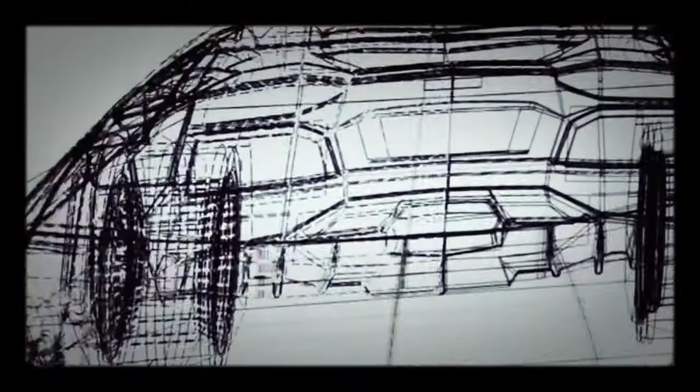But this will be no simple reworking of Lamborghini's old flagship models. Its engineers and designers are given the task of starting with a completely clean slate. At its mega factory in northern Italy, the Lamborghini team has been stretched to its limits to fulfill those expectations. Now, as its latest creation takes to the road, it will be seen if the high-risk strategy has paid off.

Lamborghini has been responsible for some of the world's most iconic sports cars of the past half-century: the 350 GT, Miura, Countach, Diablo. The brand has achieved global recognition for its no-holds-barred approach to automotive engineering. Its extreme and powerful machines have placed it among the supercar manufacturing elite for decades. But there's no room for complacency in this increasingly crowded marketplace. A decade since the launch of their last flagship model, the Murcielago, it's time for Lamborghini to flex its muscles once again.

It's up to Stefan Winkelmann, the company's CEO, to come up with a bold approach. One of the toughest things was to give the right briefing, and it took us weeks and months. And once I went home, I was thinking about it, and it's so easy, it's just down to two words: no competitors.

Four years of intense development follow, conducted in fiercely secretive conditions. Our factory was as closed as Fort Knox. We had to prevent anybody from coming in and taking any picture to avoid leakages.

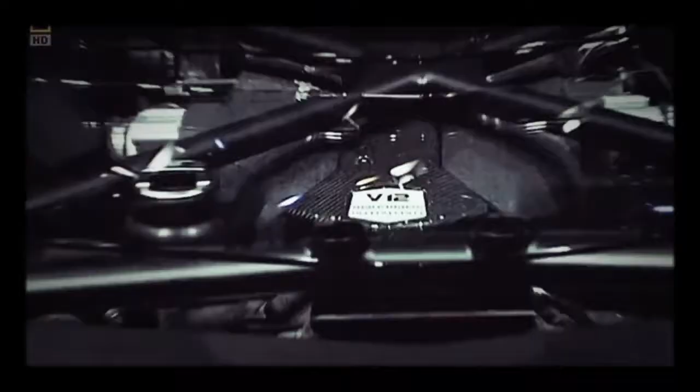But finally, in March 2011, at the Geneva Motor Show, Lamborghini casts off the secrecy and unveils its latest model, the Aventador LP700-4. Its launch has huge implications for the future of the company. For us, the Aventador was something which has to re-establish the leadership, to be a benchmark for a decade. So it has to be a jump of two generations, something really different from what has been there.

Powered by Lamborghini's trademark V12 engine, the Aventador can reach speeds of up to 350 kilometers per hour, and it travels from 0 to 100 in under 3 seconds. It's their fastest car yet.

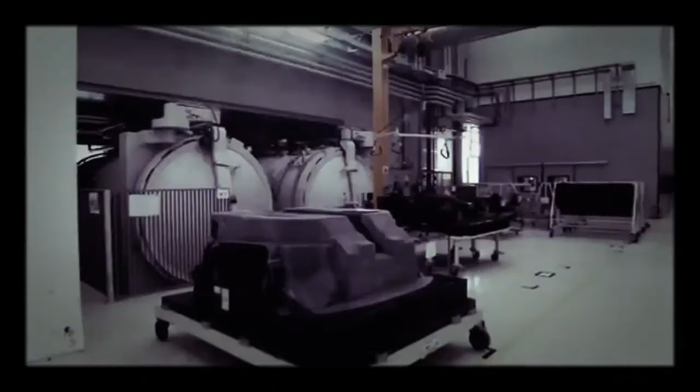But remarkably, speed isn't even top of Lamborghini's priorities for the Aventador. Stefan Winkelmann has laid out his vision in a manifesto for the future of the supercar. Now, in our days, it's much more important to speak about the power-to-weight ratio, the balance between the power of the car and the weight of the car. For us, in the future, it's much more important to reduce the weight, because you get a better feeling, a better driving experience.

The Aventador is the first test of this new blueprint. The National Geographic Channel has been given unique access at the Lamborghini factory to witness the creation of some of the car's first incarnations.

This is Sant'Agata Bolognese, a typically picturesque town in the heart of Italy's Emilia-Romagna district. But it is in fact anything but typical, as it's home to Lamborghini, one of the world's most renowned supercar manufacturers.

The factory is situated in the heart of what is known as Motor Valley in northern Italy. Sant'Agata is intrinsically linked to Lamborghini's success, according to its head of communications, Raffaello Porro. Everybody in the world recognizes our cars come from Sant'Agata Bolognese. And so our factory is a kind of temple where people come, almost a pilgrimage, to visit where those cars come from.

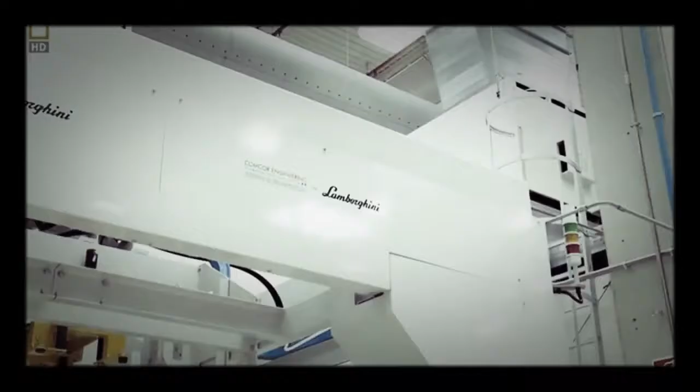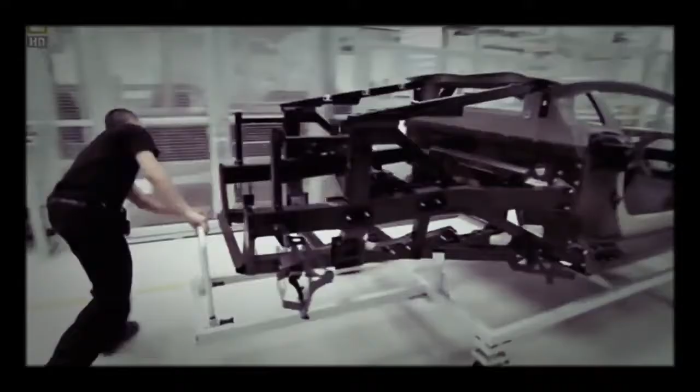The factory has seen many changes over the years, but its purpose has never wavered: to produce vehicles that challenge the status quo. And a largely local workforce is a vital part of that ethos. They're coming from this region, not even from the wider region, from this part of Emilia. We are in Emilia-Romagna, the Motor Valley, and a lot of our people are not only living here, they were born here, they've been here for generations. A lot of the workers we have in our factory, in our plant, are here at the second generation.

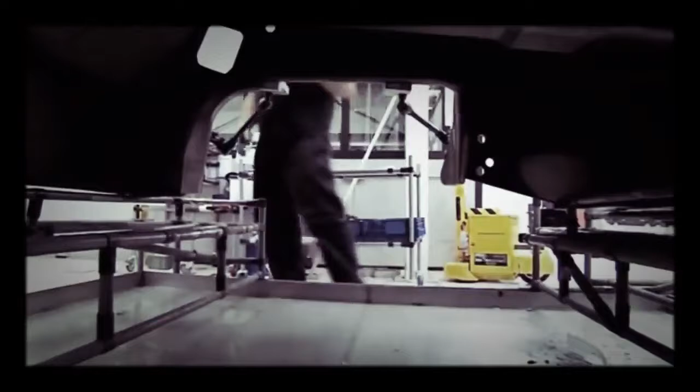These people are Lamborghini's lifeblood, over 400 individuals working with a singular aim: to produce high-end vehicles that consistently capture the public's imagination. In the last couple of decades, a new breed of creative and high-tech vehicle specialists has emerged. Companies such as Pagani and Koenigsegg have set their sights on toppling the most revered names in supercar engineering. Names like Lamborghini.

But it's unlikely that this Italian giant will let its mantle fall without putting up a fight—an attitude embodied in the company's emblem, the Raging Bull. Partly inspired by the bravery of Spain's legendary fighting bulls, one of which showed such fearlessness in battle that it was awarded a trophy for its courage in 1993.

Its name was Aventador, and almost 20 years later its legacy lives on in Lamborghini's latest model. It's Aventador's battling spirit that Lamborghini's development team must channel.

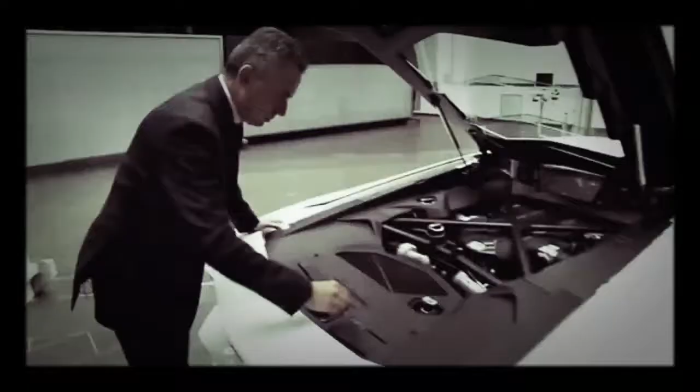In 2007, they're faced with the daunting task of creating a supercar that sets the standard for all others. Maurizio Reggiani, head of research and development, realizes that the only way of doing so is to take a step into the unknown.

We had to completely redefine the car, to start from a blank sheet of paper, and on this sheet determine, for each function, all that was needed to ensure that we'd have the best car in the world—to completely redefine what constitutes a super sports car.

To start from a completely clean slate is extremely high risk, and it's up to Reggiani to convince the board that it's the right thing to do.

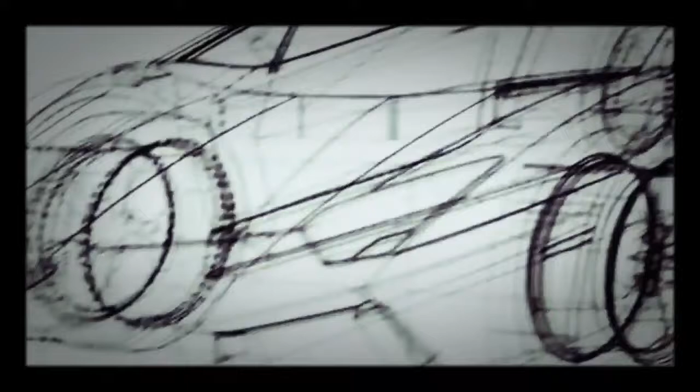This was one of the hardest things, because the project we were presenting had nothing in common with the old Murcielago, not with anything that existed in production at all. So it really meant beginning from scratch, with all the risks that come with that.

But the board decides the risk is worth taking. At the end of the day, they understood very well, because this is, again, about what Lamborghini is all about—to recreate and to be always revolutionary in the approach.

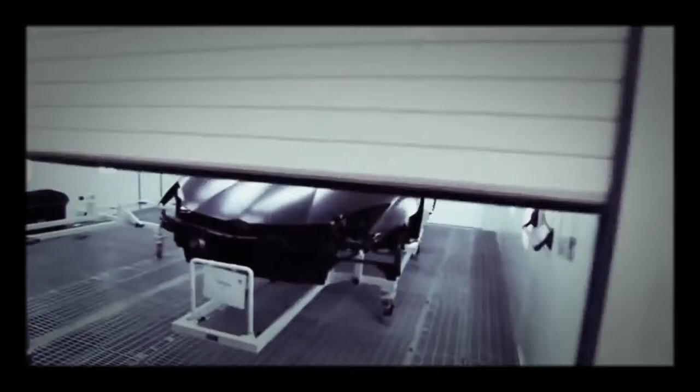The spirit of innovation is apparent in every fiber of the Aventador, as Lamborghini know that the fight to stay at the top won't be won through half measures.

And nowhere is that combative approach more apparent than in their focus on lightweight construction, which they've taken to new levels with an entirely new concept for road cars: a full carbon fiber monocoque.

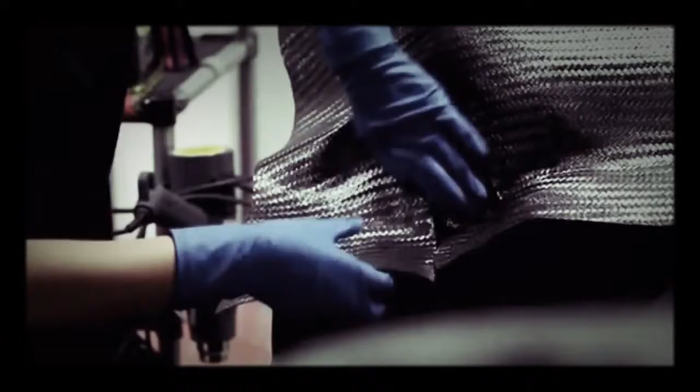These structures are common in racing cars, but the high cost of materials and laborious production methods have made them unavailable to supercar manufacturers, who've had to combine carbon fiber with cheaper, heavier elements, such as aluminium. That is, until now.

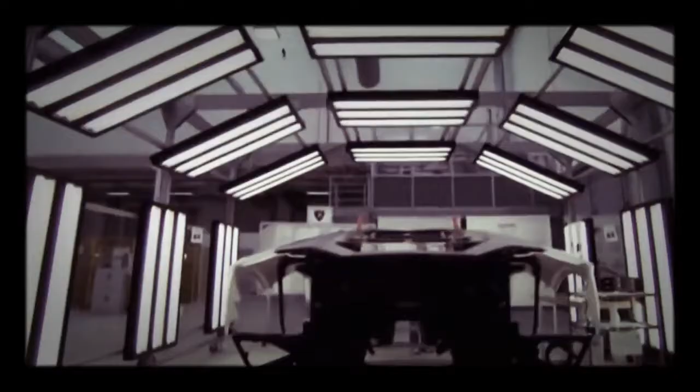The development team has devised a method that allows this race car technology to be mass-produced. But it requires a specialist facility that's up to the task. So in 2009, they build a whole new mega factory just down the road from the company headquarters, devoted to constructing the Aventador's unique carbon fiber body.

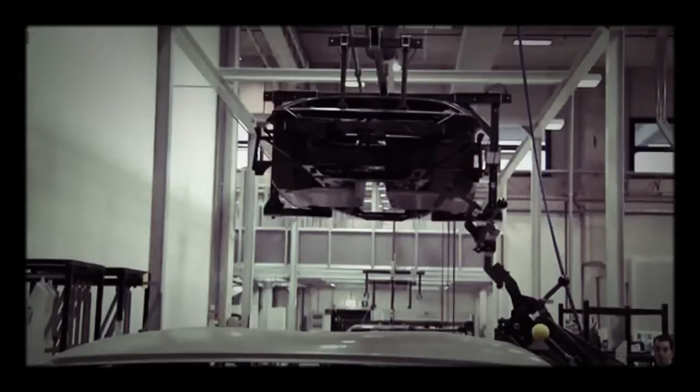Which, being just 147.5 kilograms, helps make the Aventador significantly lighter than the Murcielago, considerably improving the all-important power-to-weight ratio, and in turn, the handling.

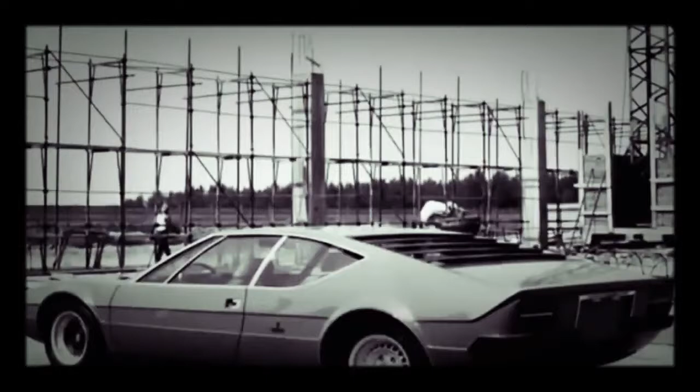Lamborghini hopes that this innovation will stave off the threat by the new wave of rival companies. Lamborghini knows well what it's like to be the cocky young upstart, vying to unsettle the established names, as that's how it began almost 50 years ago.

The man upsetting the status quo back then was the company's founder, Ferruccio Lamborghini. He had made a fortune from a tractor manufacturing business and used some of his money to satisfy his love of sports cars.

According to Lamborghini legend, when he went to Ferrari to critique some of their parts, his views were dismissed. He got a negative response to some requests he had and proposals to make a better car. And so he said, I will found my own company and I will create the best super sports cars ever.

He established Automobili Lamborghini in 1963, and for the next few years he toiled furiously to achieve his goal. The cars he created were well received, but it wasn't until the launch of the iconic Miura in 1966 that Lamborghini really made its mark.

The tractor maker had succeeded in breaking into the exclusive world of supercars with his bold new enterprise. Almost 50 years later, despite having joined the ranks of well-established sports car manufacturers, the company still strives to be edgy and uncompromising.

As demonstrated by its approach to the area it believes will define the future of sports car engineering: lightweight carbon fiber construction.

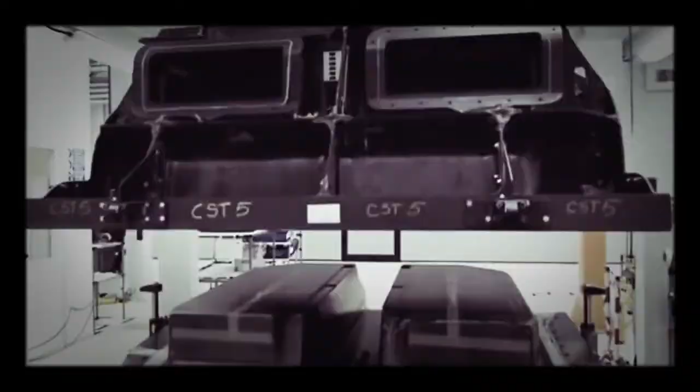The company's relationship with carbon fiber goes back as early as the 1980s, when it created the Countach Evoluzione, a concept car which experimented with the use of composite materials. It was dreamt up by the newly formed Composites department, whose successor has made many inroads into research and development of lightweight composite materials.

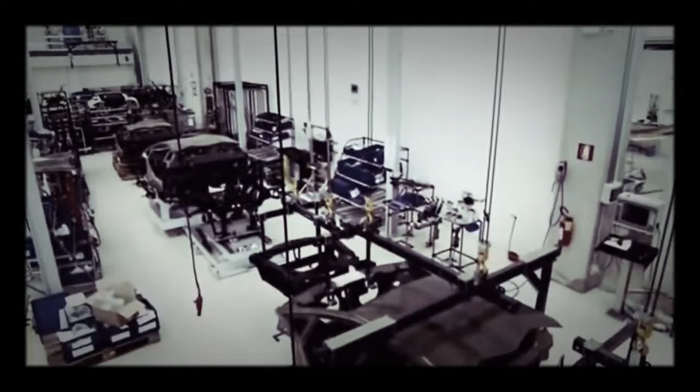And discoveries made here mean that next door, the company has been able to construct its new carbon fiber production facility.

The man given this task in 2009 is Ranieri Niccoli, Industrial Director, and he must devise it completely from scratch. When we designed and built this factory, we didn't have any automotive benchmark. We were the only one in the automotive business to build and run this kind of technology. So they have to look elsewhere for inspiration.

We looked to other sectors, for example the aeronautic sector. Then we adapt and modify their process to a Lamborghini production system in order to build our car.

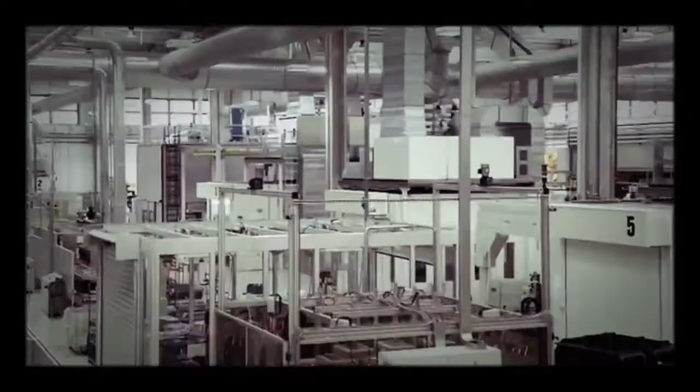The result is 500 square meters of new production space, known as the CFK, devoted entirely to sculpting the Aventador's super lightweight monocoque.

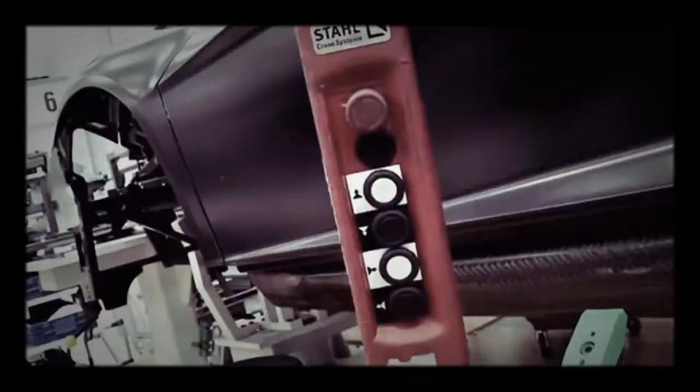Here, 146 carbon fiber specialists toil day and night to create 4 complete monocoques every 24 hours.

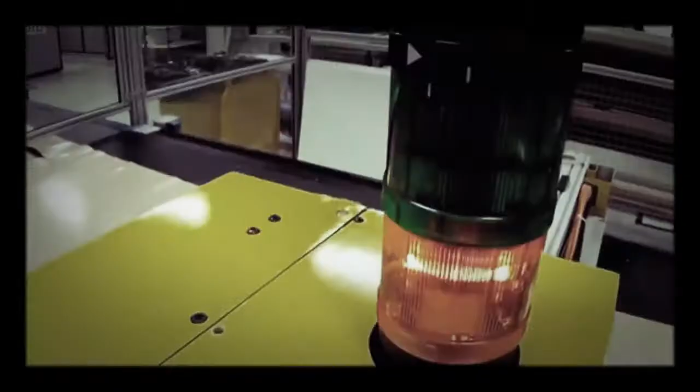To achieve this target, engineers have developed a unique production system. All materials are first cut by an automated machine before being sent for preparation.

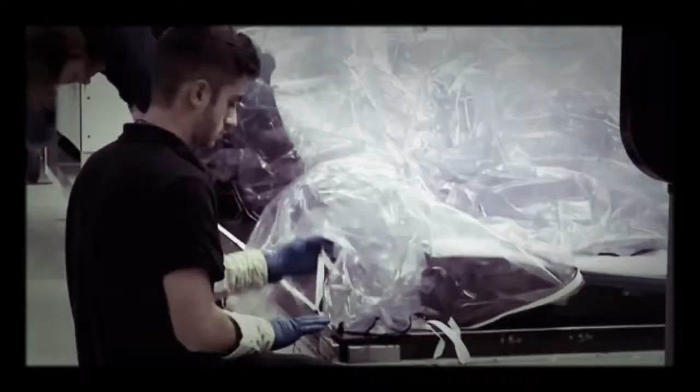The material is placed into molds and laminated in a vacuum bagging process which forces the layers into shape, before being cured in a large pressurized oven known as an autoclave.

Meanwhile, the production of other parts of the monocoque is underway, as operators fine-tune and cut more layers of carbon fiber with the assistance of precision lasers.

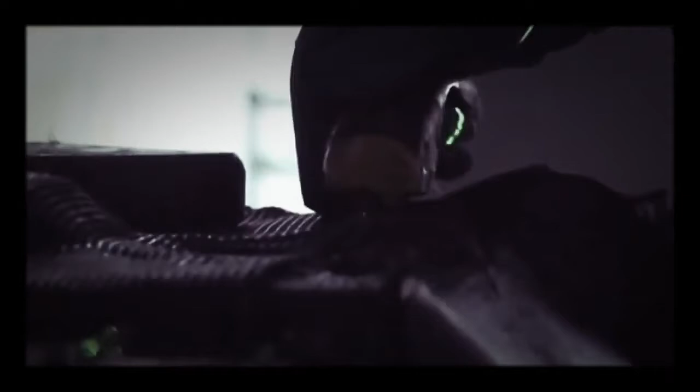A special oven is used to inject resin into the carbon fiber mats, which transforms them from soft sheets of cloth-like material to a strong, rigid structure.

After all these processes are over, the two key sections are finally recognizable: the base section, known as the tub, and the roof.

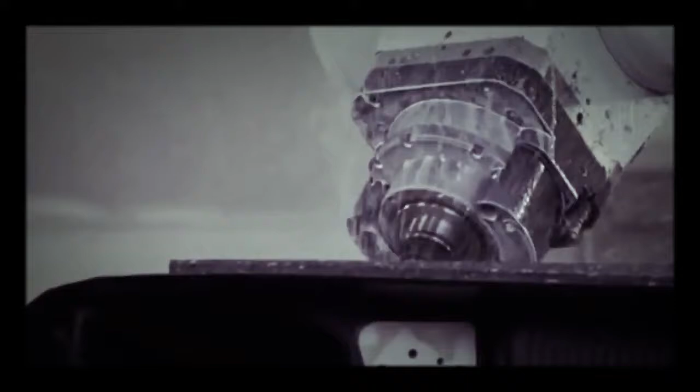They're placed in an automated machine, which drills them with holes allowing for attachments to be made later.

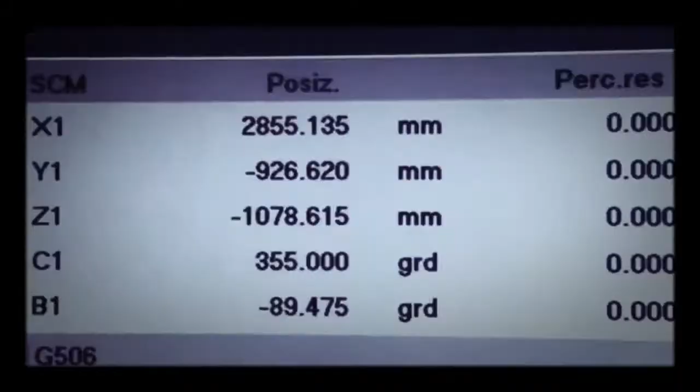Throughout the factory, computer-controlled machines share tasks with human specialists, a partnership that's integral to the Lamborghini production process.

The main priority of our plant was to follow the Lamborghini production system, so with a high degree of craftsmanship, high degree of skill, people, combined with technology and an automatization process. This was the main challenge that you can also see in our plant.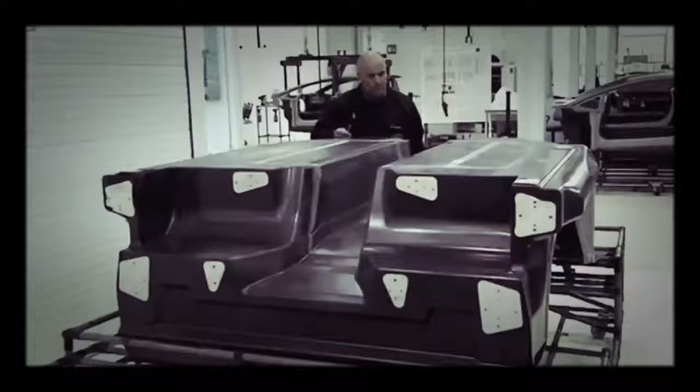Aeronautic-inspired engineering is ingrained in many aspects of the Lamborghini CFK production process, such as this stage, known as the Harmonic Hammer Test.

In this quality control test, an operator strikes the monocoque section with a specially designed hammer and allows it to vibrate, listening out for areas where air might be trapped in the carbon fiber shell.

Once checked, the parts are ready for their union as the tub and roof are glued together, turning the monocoque into a single entity.

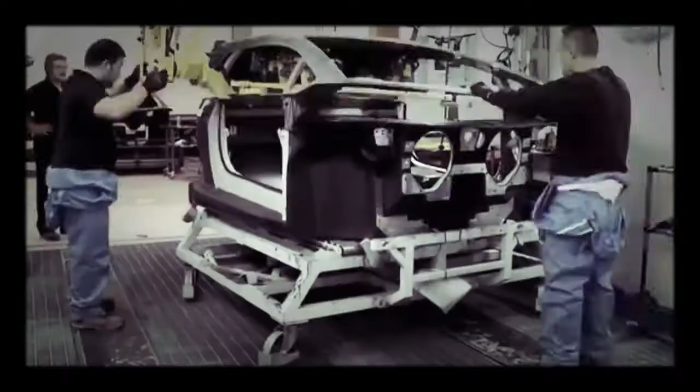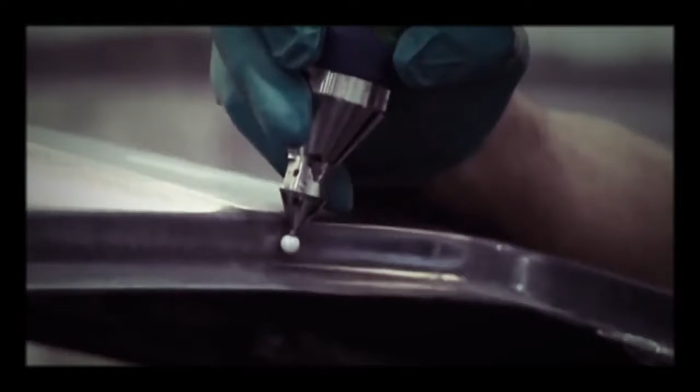It's essential that the two parts of the monocoque are exactly aligned, so workers use a robotic arm with a 3D laser attachment to check that the sections have been coupled correctly.

Once the correct dimensions are confirmed, metal sections are manually attached to the monocoque and the body is complete.

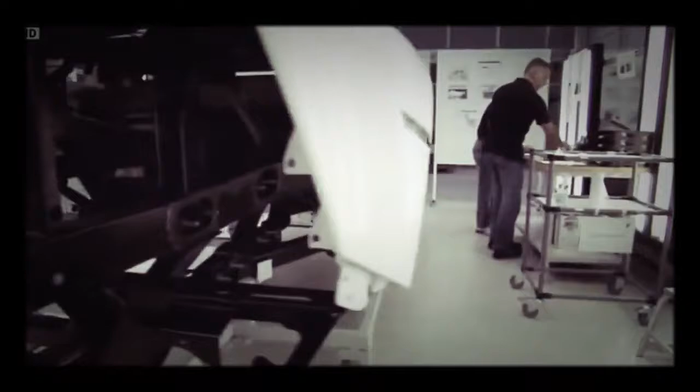Then it's into a light tunnel where surfaces are quality checked to ensure they're in pristine condition before the Aventador's body is signed off for release.

As the body is ready to leave the carbon fiber plant, it's possible for the first time to see the Aventador's unique geometry taking shape.

This extreme design is one of the most recognizable aspects of the Lamborghini DNA, and it's a tradition maintained and pushed forward here at Lamborghini's design center, or Centro Stile.

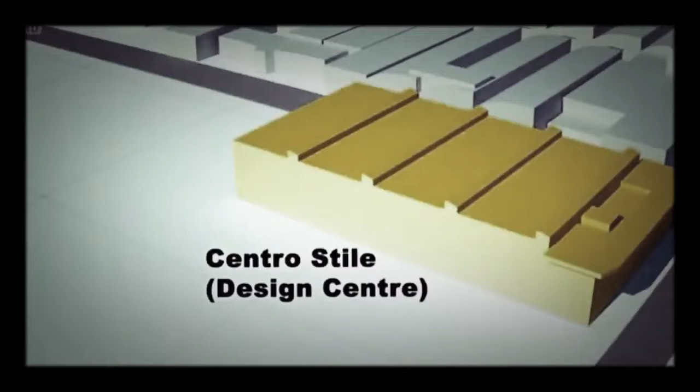The generational leap required of the Aventador does not stop with its engineering capabilities. The look of the car is integral to its ambition.

The design of Lamborghini always has to be revolutionary. You have to understand, if you see a car in front of you, this can only be a Lamborghini even if you don't know the model. So it's very tough for our designers because they have to create something new, but recognizable at the same time.

The job of the design team and its chief, Filippo Perini, is made even tougher during the earliest phase of the Aventador's development, when the board forces them to compete with outside companies to earn the right to design the new model.

And at one point, victory comes close to slipping through their fingers.

So we take it from nature, sport, technology, lifestyle, elements that we can integrate, and in that way, brainstorming gives us many design options.

Details like the ignition button and TFT screen seem to come direct from a jet fighter cockpit. And the world of aeronautics influences a lot of other style choices besides.

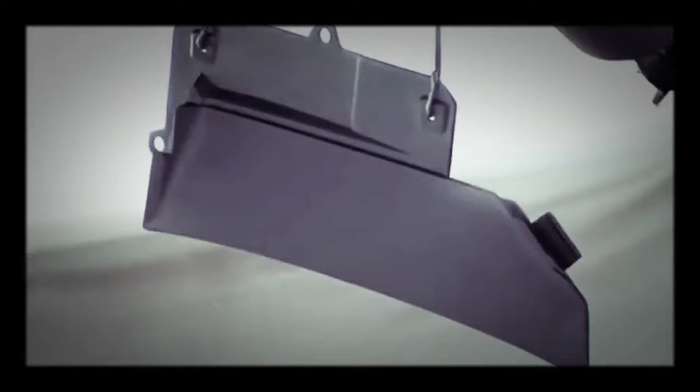One of 13 colors are hand-sprayed over every part of the bodywork. 27 pieces are given individual attention by a specialist who covers them with 8 liters of paint. The Aventador, with its extreme lines, requires more man-hours than any other Lamborghini in the past.

And of course, every phase is carried out manually, as only human analysis and dexterity can ensure that each surface is covered with exactly the right amount of paint. In total, 200 man-hours are spent on every single Aventador while at the paint shop.

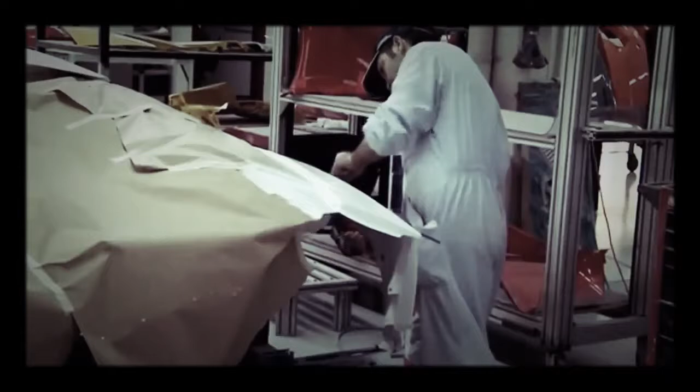3 whole days are spent on polishing alone. After being carefully sanded, the Aventador is repeatedly buffed with special materials.

After that, it's sent for another quality check in a light tunnel. For 2 hours, an inspector walks around the bodywork checking for color perfection. If there's any inconsistency, the offending section will be sent back to be repainted.

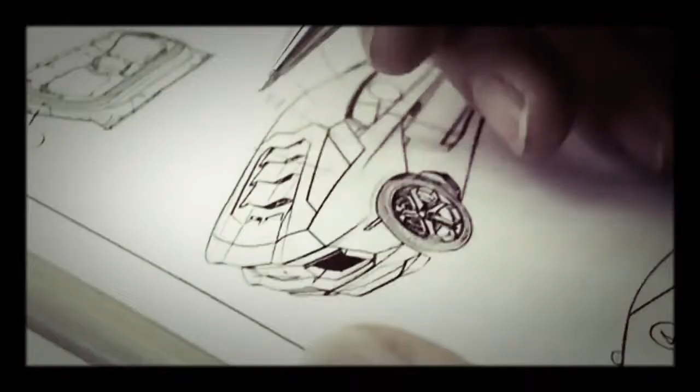Under-polished areas are also marked out for extra attention. These hundreds of hours of devotion end when the exacting standards of the inspector are met, and the car is released for the next phase of production, the assembly line.

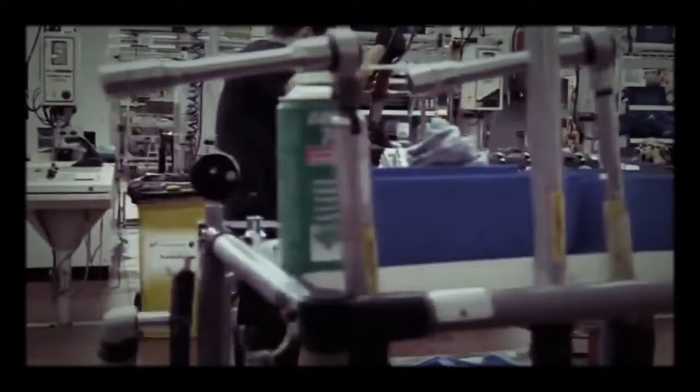The assembly line for the Aventador lies just meters from the original site of the Lamborghini factory, built almost half a century ago. Back then, its founder, Ferruccio Lamborghini, was known for his hands-on approach, frequently seen on the factory floor directing operations. He focused on the skill of the mechanic as being key to the success of the product, and that attitude still permeates the site today.

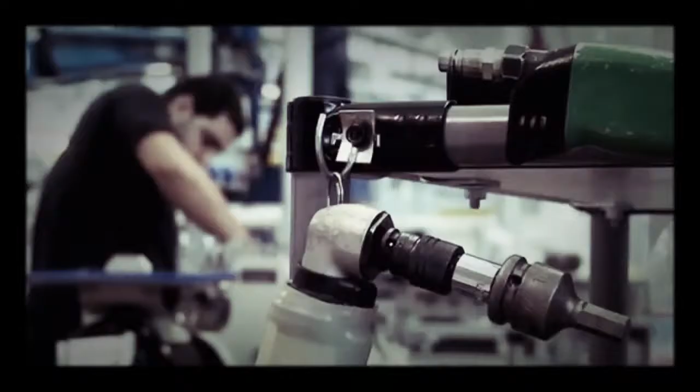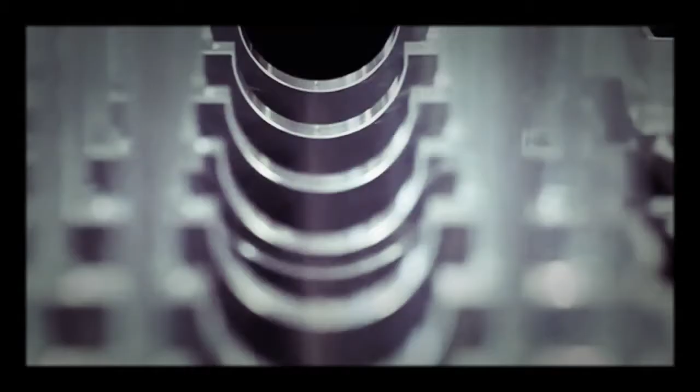Here, 50 workers spread over 11 workstations are responsible for the task of assembling Lamborghini's latest model. The man in charge of making sure things run smoothly is production manager Andrea Costantini. He sees his highly trained workforce as a direct link with the roots of the company.

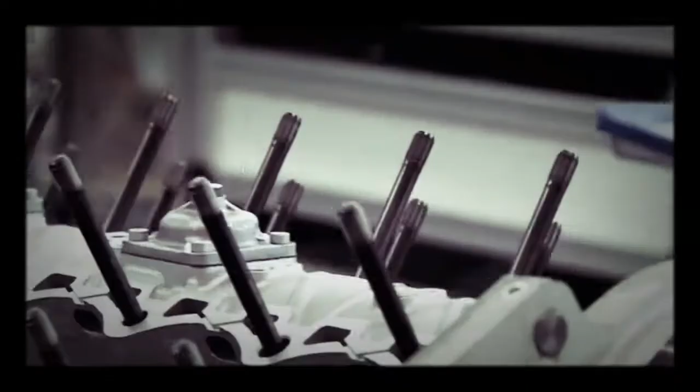In this case, the workers are the most trained. We take these guys directly from the best schools of mechanics of Emilia-Romagna, here in the surroundings of Lamborghini, and we train them for more than 2 years to allow them to be really the best experts on mechanics and engines. So everything is done manually, still like we did since 1963, since when Mr. Ferruccio Lamborghini, the owner of Lamborghini, started.

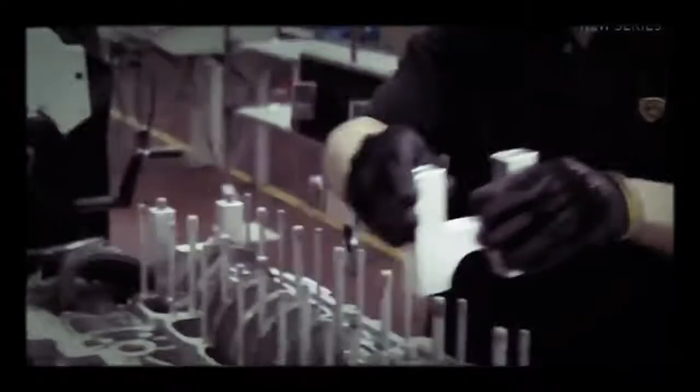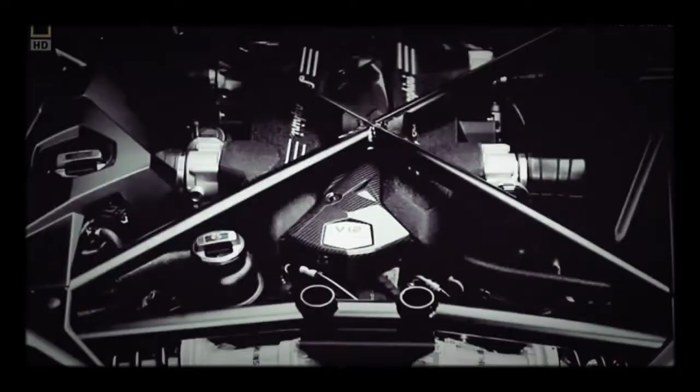In an age when machines dominate production in almost every field of manufacturing, loyalty to the art of skilled manual labor is not often seen. But here it's believed that when it comes to reliability and precision, humans still have the edge over machines. And nowhere more so than in the engine assembly station, for this is where the heart of the Aventador is put together: the Lamborghini V12.

At a time when many sports car manufacturers are shying away from using the 12-cylinder engine, Lamborghini is resolute. The V12 always has and always will provide the power for their flagship models. The V12 for Lamborghini is part of our DNA. Everything for us is rooted in our history, which started with the 12-cylinder engine.

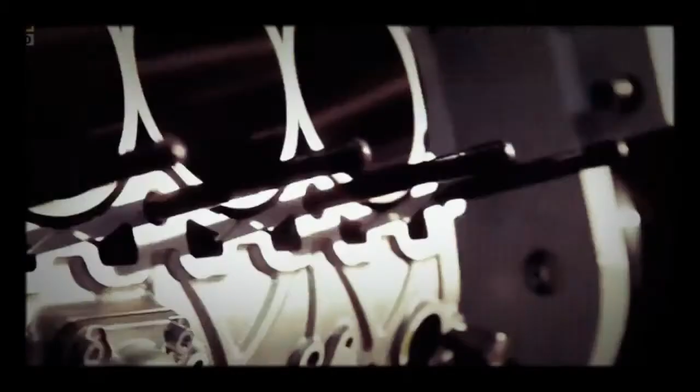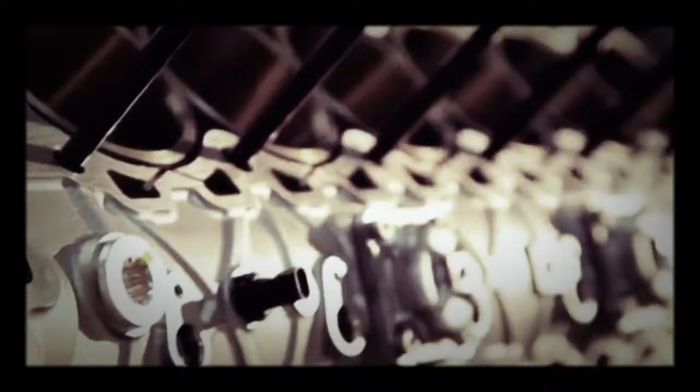With 6.5 liters of displacement and 700 horsepower, the Aventador's V12 is about as gutsy as it gets. But as with everything else, it's had to move with the times. Lightweight, again, is the order of the day. And despite the fact that this engine is more powerful than the Murcielago's, it weighs less, just 235 kilograms, by using aluminium silicon alloy on components such as the crankcase.

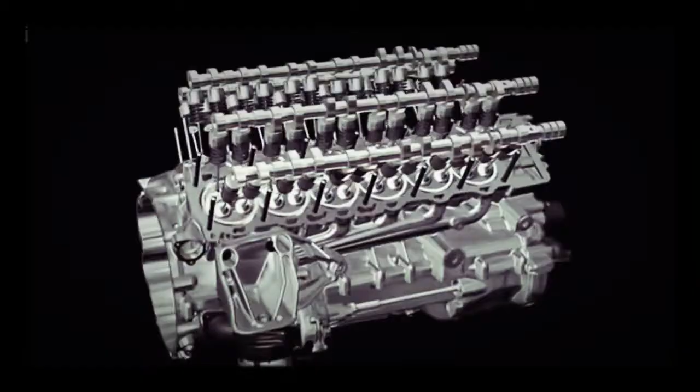The main purpose of the V12 is to power the Aventador, but when linked with the car's exhaust system, it takes on another significant role: creator of the mighty Lamborghini orchestra.

The V12 motor represents what for us is the sound, the music of the car, the way in which it's presented to the public, the way she makes herself heard and announces her arrival. To achieve this, we invest a great deal of time in simulations. We simulate the sounds that we can have, and then we experiment first in the lab and then on the vehicle itself.

This 12-cylinder symphony has a full range, from a moderate rumble through the town at low revs, to the screaming crescendo of maxed-out gear shifts.

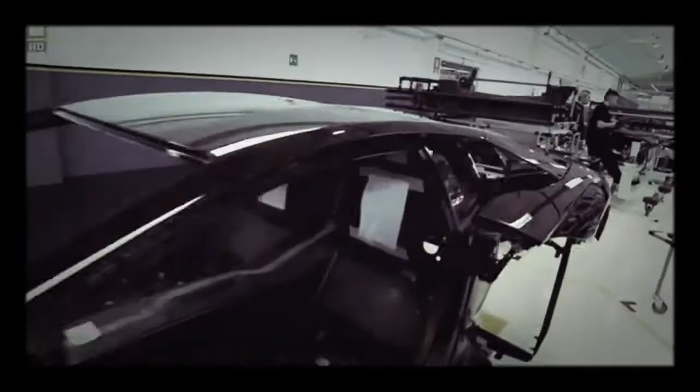While the V12 is being assembled, the body of the Aventador arrives on the assembly line, ready for conversion from an empty shell into a fully functioning supercar. As the company's latest foray in a highly competitive market, the Aventador needs a production process with efficiency to match.

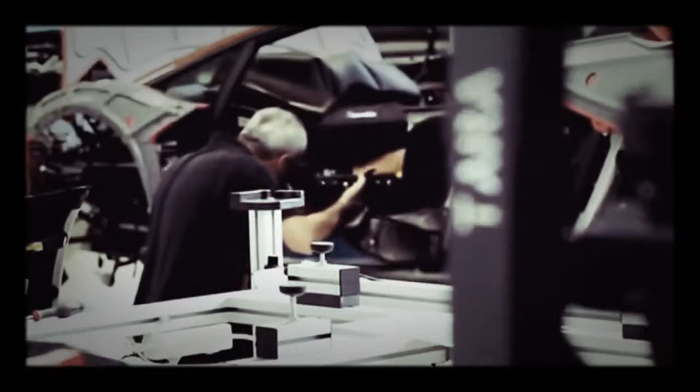The drive for improved efficiency was for sure coming from the market, from our competitors. We have always to be the best, to be number one in terms of product, in terms of performance, but also in terms of quality. So to become and to stay number one, we have always to have a huge increase of efficiency, a huge increase of quality in the assembly line and in all the processes inside the factory.

The company's output of luxury vehicles is a mere fraction of what the large-scale manufacturers produce for the mass market, with around 800 Aventadors due to be created in the first year. But that doesn't mean the factory can't be run to similarly exacting standards of efficiency as the largest groups.

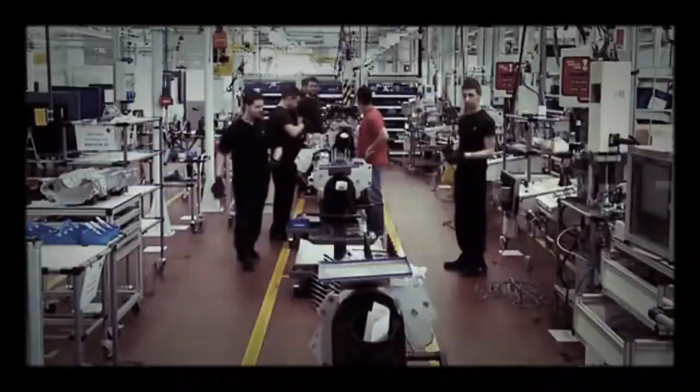That means workers have just 1 hour and 40 minutes to carry out a whole range of highly meticulous tasks. If they take too long, the whole assembly line will stall, targets will be missed, and costs will mount up.

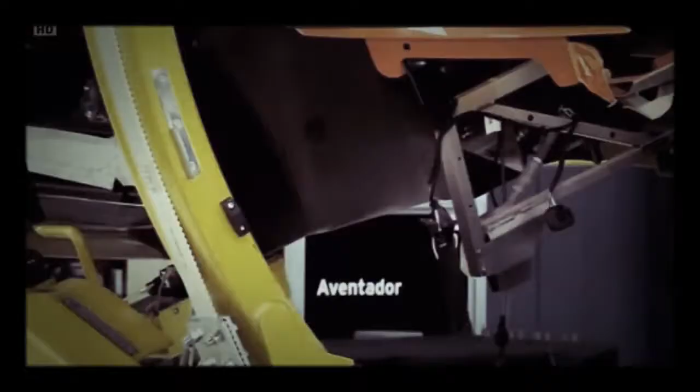The countdown starts here at the first station. Work is carried out on the underbody and front differential by lifting and rotating the vehicle to give the mechanics easy access.

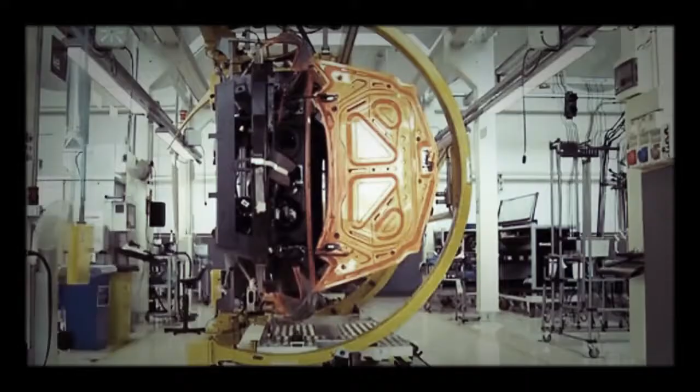Before being readied for what is arguably the most significant stage in the Aventador's production: the insertion of the colossal V12 powertrain into the car's chassis.

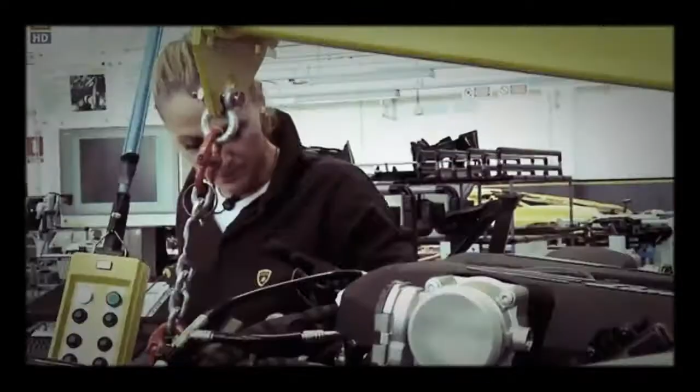Here we are in the most critical assembly station of the Aventador assembly line. This is the assembly of the engine, the heart of the car, into the body. We call it the marriage between the car and engine.

This marriage of elements is when the development team's work of the past four years comes together, where design and engineering combine.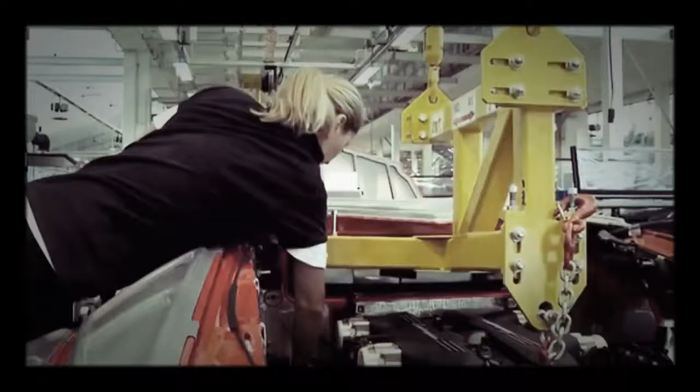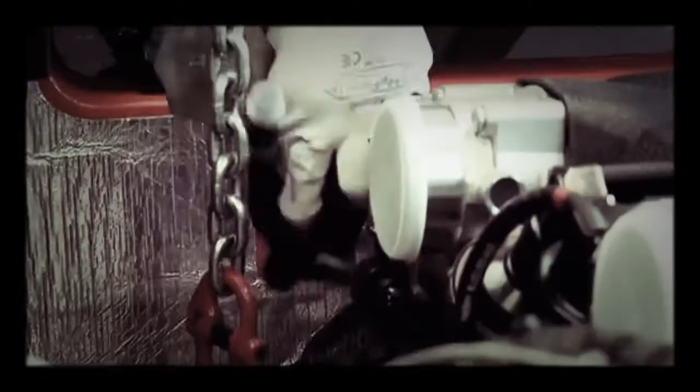Here, as with all other phases of production, the specialists of each station take full responsibility for their section. You can see the workers check each and every single connection to be sure each phase was done properly.

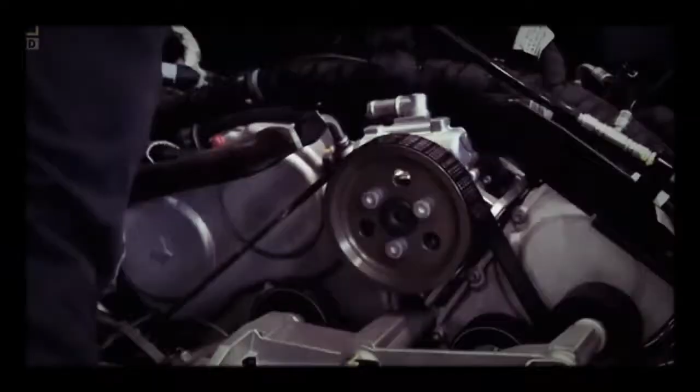The risk is that the car won't work properly during the road test, which could be a big problem for a customer. As you can see, this is absolutely not done with equipment, robots, or automation, but done entirely manually.

Step by step, the car is taking shape, being molded from an empty shell into the fully formed supercar that will leave the factory.

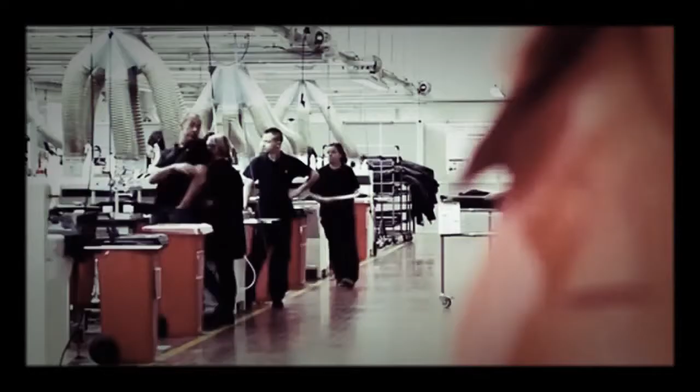And while the assembly line is in full flow, next door the second critical aspect of the Aventador is being prepared: the interior. It's in this sector of the factory that a customer's individual preferences for the way their car looks can really be indulged.

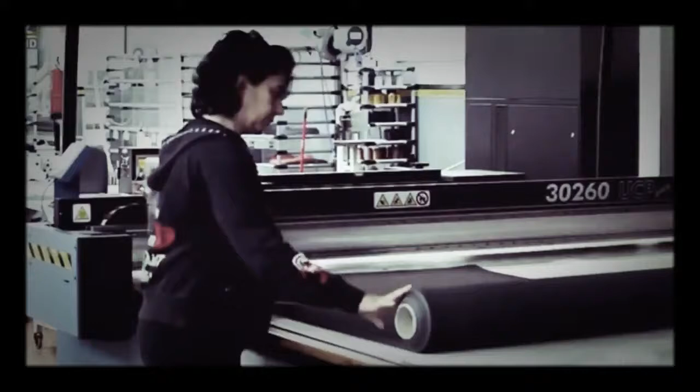About 100 square meters of leather hide in 9 different colors arrives each day. Attention to detail is essential to pass the stringent quality control checks.

Here, a leather specialist looks for minor imperfections in the hides and marks them up wherever found. An automated machine recognizes the marks and cuts around imperfections, leaving only pristine material for the Aventador's interior.

The leather is then taken to specialists with three years of training to be stitched and glued onto the various parts that make up the Aventador's interior.

Back on the assembly line, one of the Aventador's most important pieces of kit is ready. This simple-looking item is the suspension, but its apparent simplicity belies the creativity that goes into its engineering.

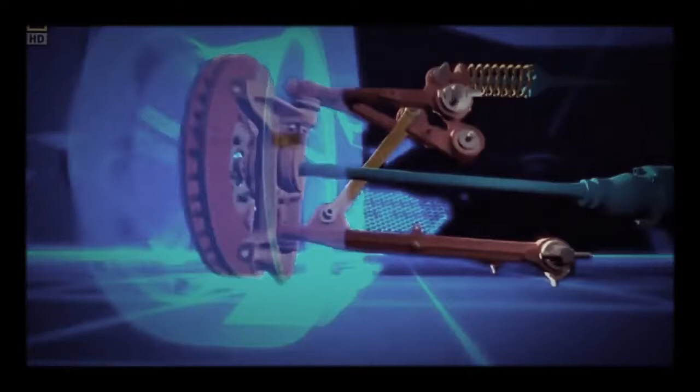The Aventador uses a pushrod suspension system direct from the world of Formula One race cars. It works by keeping wheel control and damper elements separate. By keeping the damper elements inboard, the pushrod system allows the wheels to maintain maximum contact with the road when going round bends, massively improving the handling on corners — a must for a car that can hit speeds of up to 350 kilometers per hour.

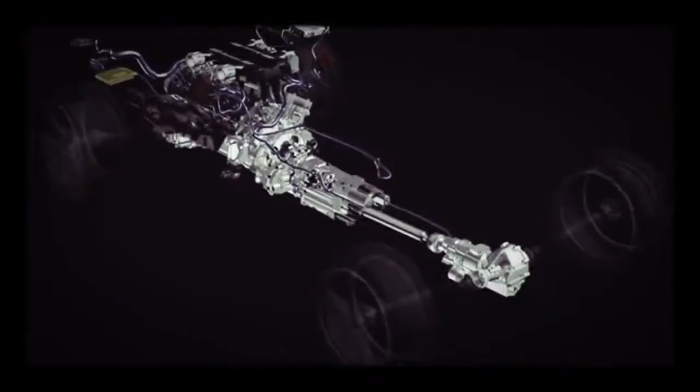But it's what's happening away from the eye that's most remarkable: the Lamborghini patented independent shifting rod transmission.

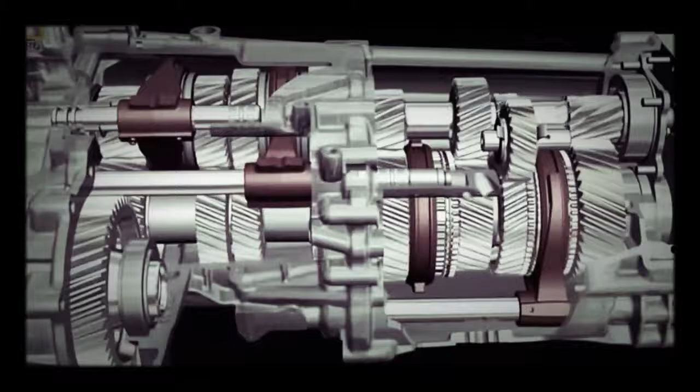This technology allows the shifting process to run virtually in parallel. While one shifting rod is disengaging one gear, the second shifting rod can already engage the next gear, creating a shifting time of just 50 milliseconds — not far off from Formula One transmission times, which average around 30 milliseconds.

Such technological innovations are only made possible by extensive testing of the vehicle during the development phase.

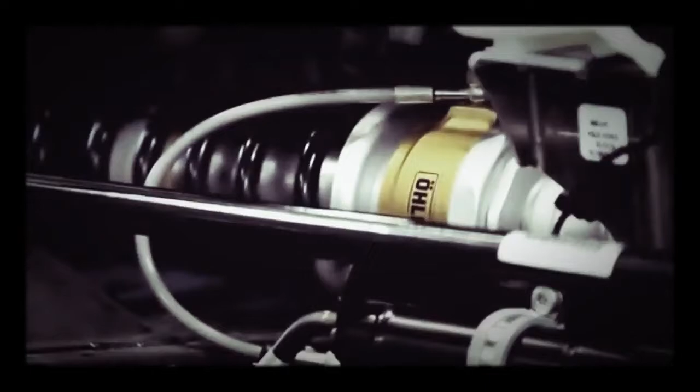And possibly the most critical moment for the engineers is when the prototype model takes to the track to be put through its paces for the first time. For the Aventador, this happened back in 2008.

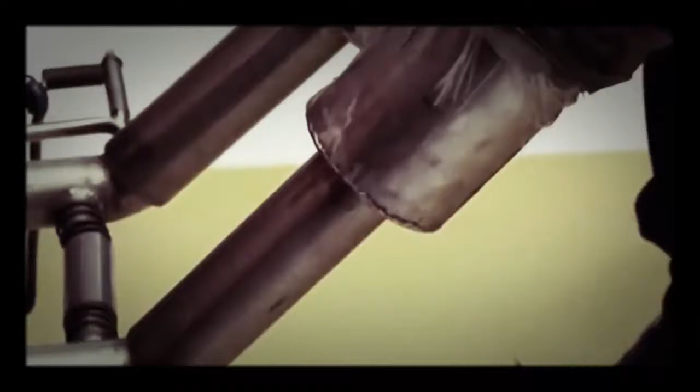As important as the assembly process itself is the series of quality control checks that the car must undergo once it's complete. Any minor imperfection could impact on the car's performance, and its safety elements in particular must be rigorously tested.

The brakes are checked in a room where the car is driven at speeds of up to 140 kilometers an hour on a rolling road. The Aventador's carbon ceramic brakes can take it from 100 kilometers per hour to a complete standstill within 30 meters. And in theory, the Aventador is capable of going from 0 to 100 and back to 0 in less than 4 seconds.

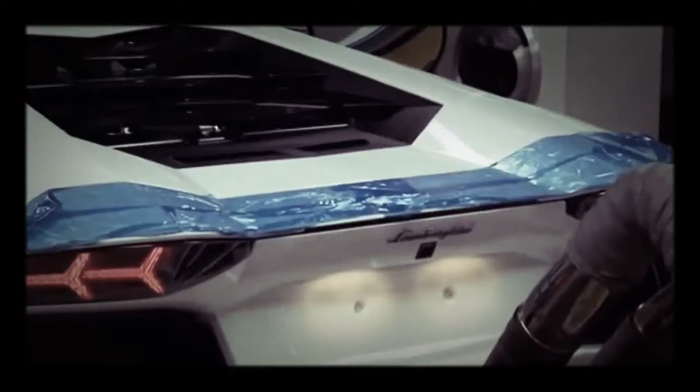Data from the anti-lock brake system is transmitted wirelessly to 2 dishes, then into a computer mainframe for analysis.

The final task of the factory workers is to scrutinize the car in a light tunnel to ensure that aesthetic standards haven't been affected during the assembly process.

But before it can be shipped to whichever global location it's destined for, each Aventador must undergo one final phase: the all-important road test.

Every car is given its own test drive around the local area. They're put through their paces to check that their complex engineering is absolutely in tune. And it's here for the first time that the cars are enjoyed as they were intended to be. Only once the test driver is satisfied that all aspects of the Aventador have been properly configured will he sign it off for release to the outside world.

The Aventador has come a long way since the brief was first given for its creation in 2007. Years of struggle from designers, engineers and mechanics have culminated in a vehicle which looks likely to remain as Lamborghini's flagship model for some time to come.

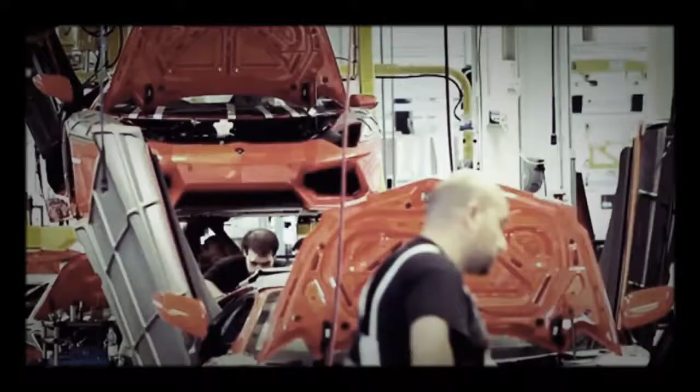The risk of starting completely from scratch has paid off. And with the new era underway, complete examples of the Aventador are rolling off the assembly line at a rate of 20 each week.

But for Lamborghini, the challenge does not end here. As the company celebrates its 50th anniversary in 2013, it will be thinking of new ways in which it can push the boundaries of automotive engineering. Stephan Winkelmann suggests that a different era might be around the corner.

Our 2-model strategy for the future will not be enough, so we decided to step into a 3rd model. It will be a Lamborghini which you can be able to drive every day, so a very usable Lamborghini, but it will always have the DNA of the true Lamborghinis inside.

A Lamborghini for everyday use may be on its way. But until then, the Italian supercar manufacturer will focus all its efforts on producing vehicles which aim to keep them ahead of the competition. And right now, the car leading that charge is the Aventador.